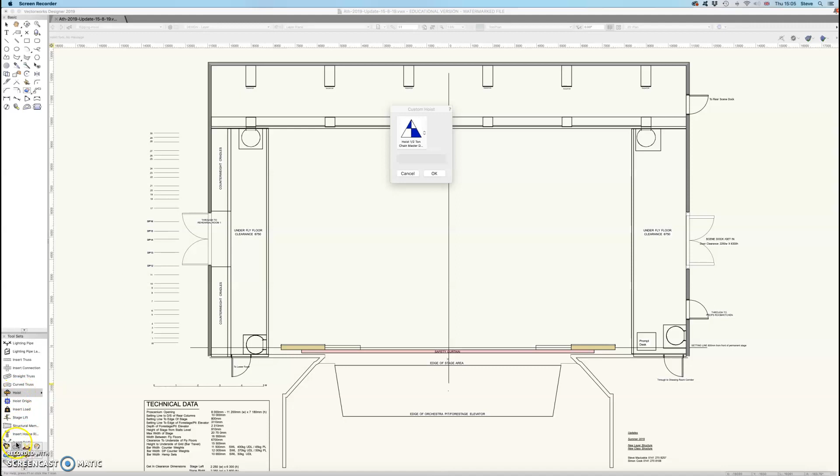So using the insert hoist tool here from the truss menu, we can select any one of the hoists within the default hoist tools chain symbols. I've been playing with this before, so it's already kind of pre-selected. I'm just going to select this, which is similar to the hoist I'm going to use.

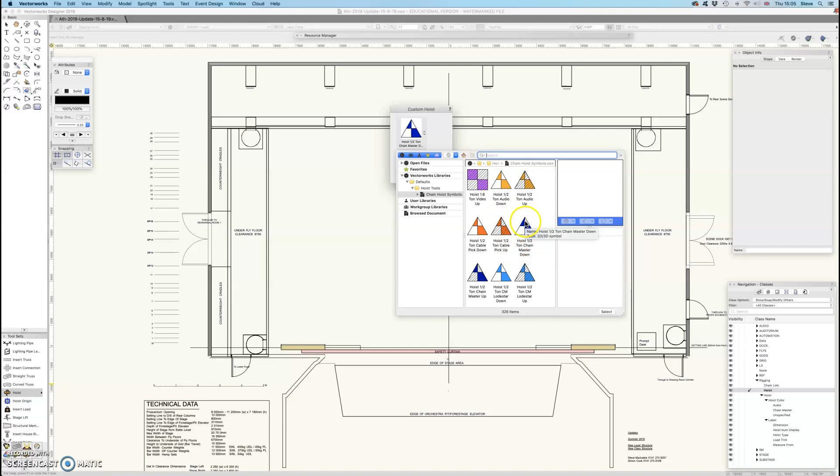Now I'm going to create a new symbol for the kinesis hoists that we have in stock, which don't appear in this menu, actually LiftKets, but I'm going to call them kinesis for ease of understanding. I'll select that and place the symbol on stage. So we can see here that the X and Y is reading here, X being this direction across the stage.

X is left from the center line, and the Y positive up from the setting line. So this one has 2680 out off center, stage left of center, and 5810 up.

If I place something on this side here - didn't mean to rotate that, I'll just place it again, try not to muck it up this time. This time we have a negative X going stage right, left of center as we're looking at it is negative numbers, and Y is still a positive up from the setting line.

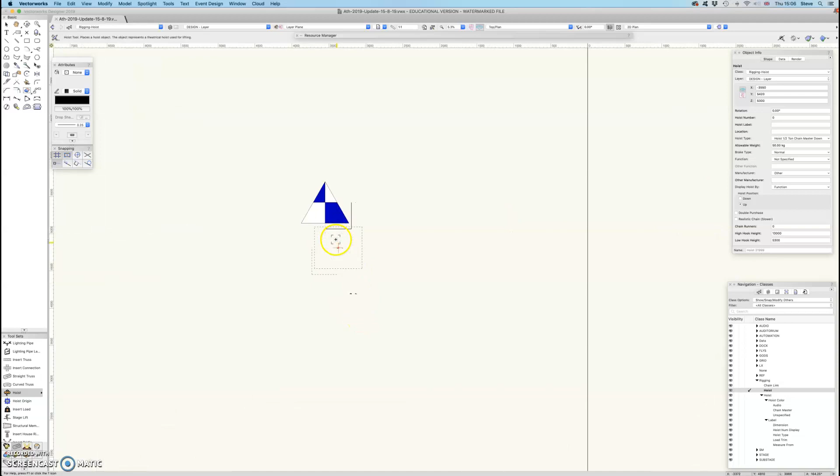And one of the problems we can fall into is that there's information here, the X and Y coordinates, but you can see as I zoom in that they're absolutely tiny. I think they're a little bit wrong as well, but we'll deal with that in a second.

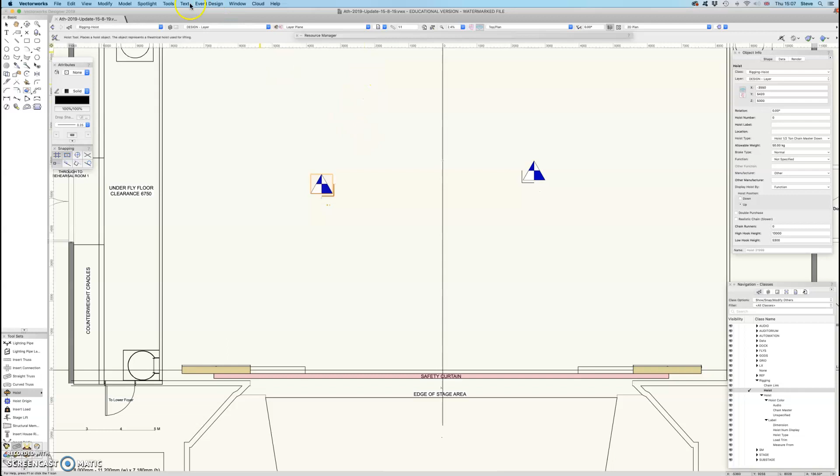So there's a couple of ways of dealing with that. We can either change the layer - I tend to work in 1:1 here. You can see there's a layer scale in the center. If you can't see that, there's a tiny little layer black arrow on the stage right here, and you can switch on the layer scale. I tend to have it on most of the time. If I wanted to, I could work in a scale.

So I could take all these layers here, edit, and change the scale to 1:25. And it should mean that when I zoom in now - I might need to place the hoist again. Yeah, so when I zoom in this time, when I place the hoist in 1:25, the information is a lot clearer. So that's one way of doing it.

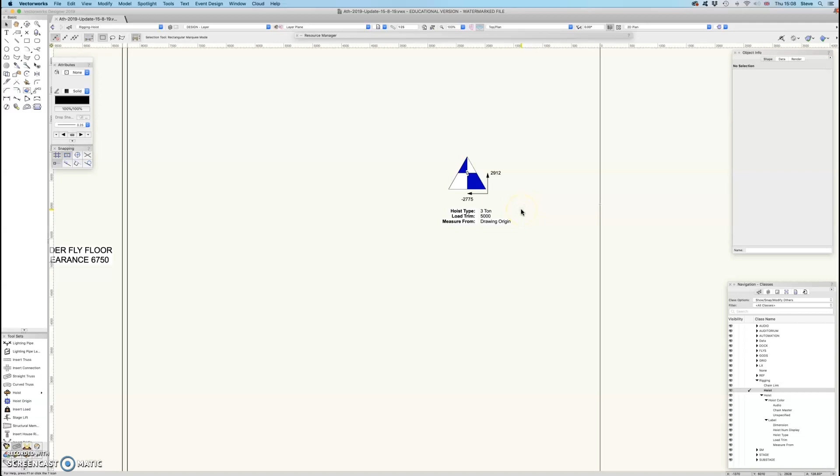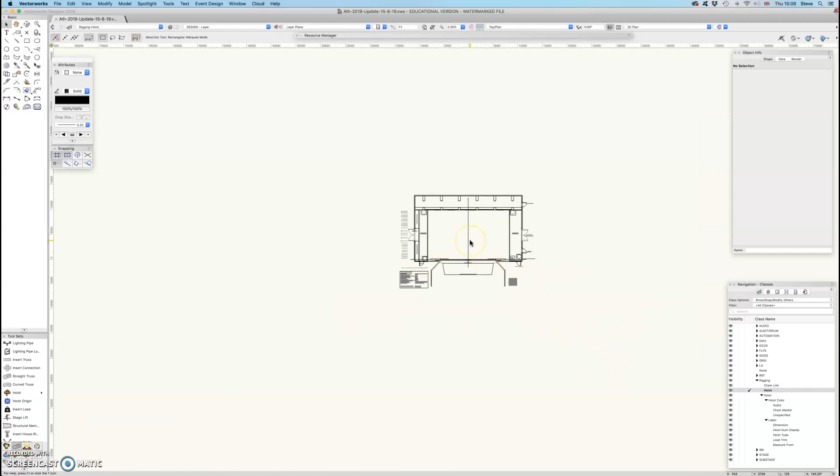The other way, I'm just going to delete this, the same thing will happen again. I'll need to redraw and take all my layers back to 1:1, and zoom out a little bit because we're back to 1:1 again. Place my hoist in the drawing.

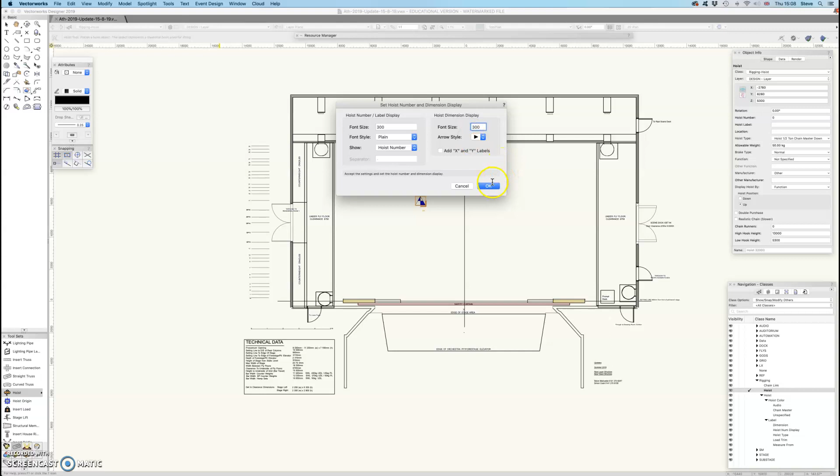If I go to Spotlight, Hoists, Number and Dimension Display, you can see the font size is 9, which is why it's not showing up. If I change that to a huge number, you can see that that's now showing on a 1:1 scale.

So I don't know which way is better, it's just two different ways of doing it. The numbers here are referring to the 0,0 point there. You can see if I scroll down, the measure from drawing origin, which is down here.

If that goes wrong for some reason, there's a hoist origin, or if you're in a venue where there isn't a known preset 0, if you're in a studio space and you've reconfigured it and you want to take all your dimensions off somewhere that isn't easily identifiable in the drawing, you can place a hoist origin in there.

If I place that, call that 0,0 - oh, I've called it something weird, but never mind. I've placed the hoist origin, and I can take the dimensions, which will be exactly the same from, it's called spot, but I can take it from there.

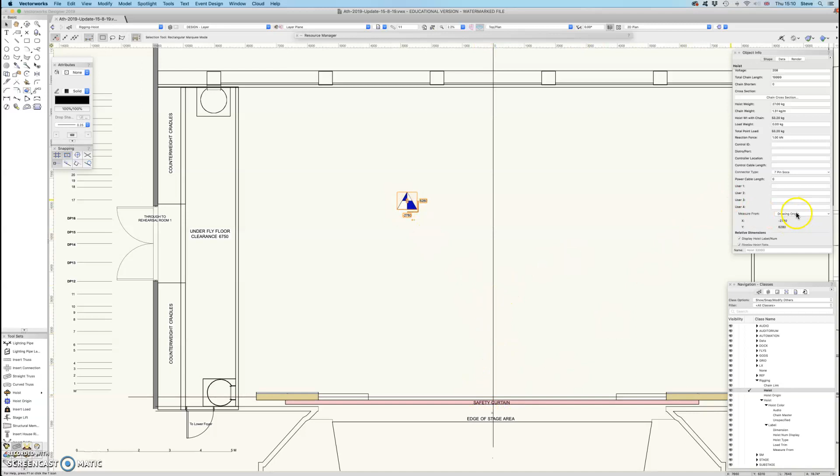So again, if I took the hoist origin from there, which would be absolutely ridiculous, then it would give me different drawings. I'm going to take them from the 0,0 point, the drawing origin, since that makes sense to me.

I'm going to place another couple of hoists, and then we'll get a report. So you would be placing these absolutely meticulously and carefully.

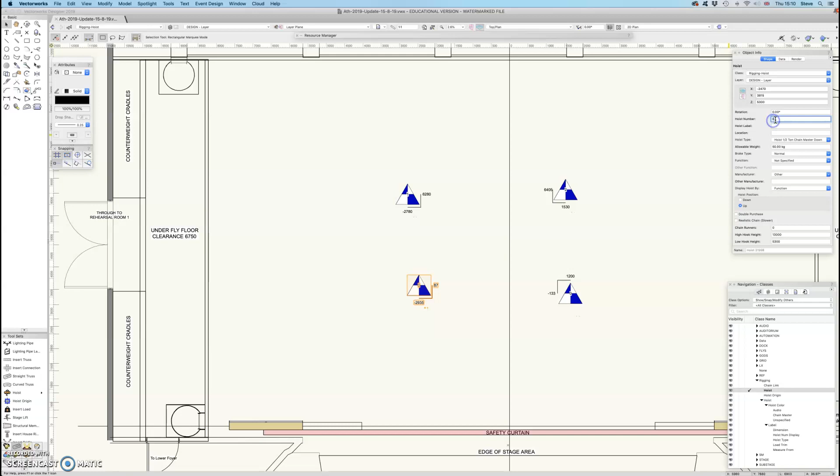And we can give these numbers as well. So we give that one number 1, this one number 2, 3, and 4.

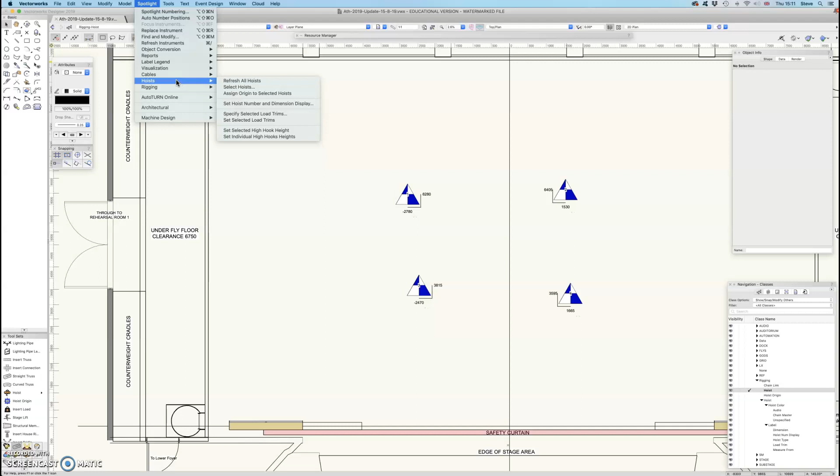If you want to do a report for this, then we can do Spotlight, Reports, Create Hoist Worksheet, and we can decide what we want in these little fields. We've got the hoist number. Not sure the location is going to work for us here. The hoist type's not really going to be much use.

The X and Y is a definite, so the hoist label I think would be useful for us, and the hoist number. Anyway, you can choose anything we like in here. OK, and then we've got this worksheet here - so we see the hoist number and its X and Y.

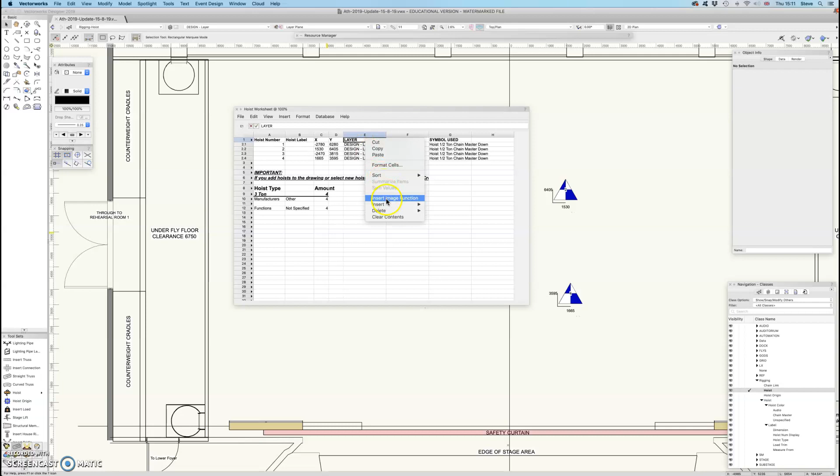If we want to get rid of any of these layers, we can simply delete the entire column. We can now configure this any way we want, but this is a really good way. You could have quite simply cut and paste that into another Excel sheet if you want - you've got yourself your X and Y positions of all these hoists.

So hope that sounds a little useful there. I'll do another quick one, another separate tutorial about making your own hoist symbol.